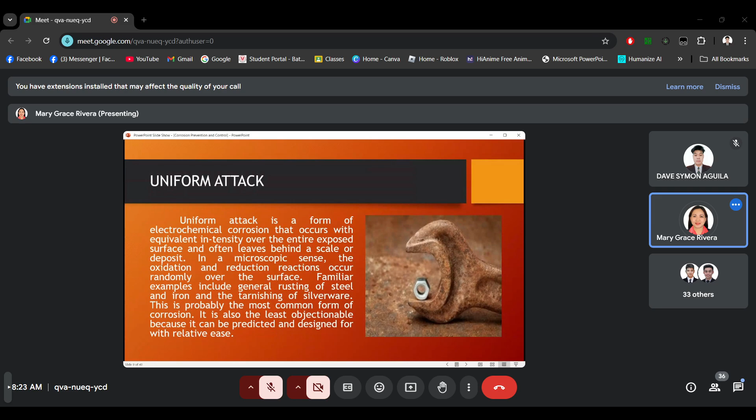Okay? It is also the least objectionable because it can be predicted and designed for with relative ease. So yung uniform attack po, mas madali lang natin siyang ma-prevent. So ito po yung mga pwede natin gawin in order to prevent uniform corrosion. The first one is we can use thicker materials for corrosion allowance. Just like po the picture na ganito, they use thicker materials.

So meaning they added the thickness of the materials in order po na kahit may kalawang na siya, may corrosion na nag-occur sa kanya, he can still use it for its main purpose. Kaya pa rin niyang gampanan yung purpose niya even though may mga kalawang na siya because we use thicker materials. So we provided a corrosion allowance. If ever po na magkaroon ng corrosion, yung strength of the materials kaya pa rin niya na gawin yung kanyang mismong gamit.

Okay, another one is to use paint. This is the common prevention and control na ginagawa natin. We use paint on the surface of the material or we coat it po. So nagkakaroon tayo ng metallic coating such as plating, galvanizing, or anodizing. For example po, galvanizing, nag-aano po tayo sa zinc. Tinutubog po natin yung ating materials dito sa other metals wherein they have a high resistance to corrosion.

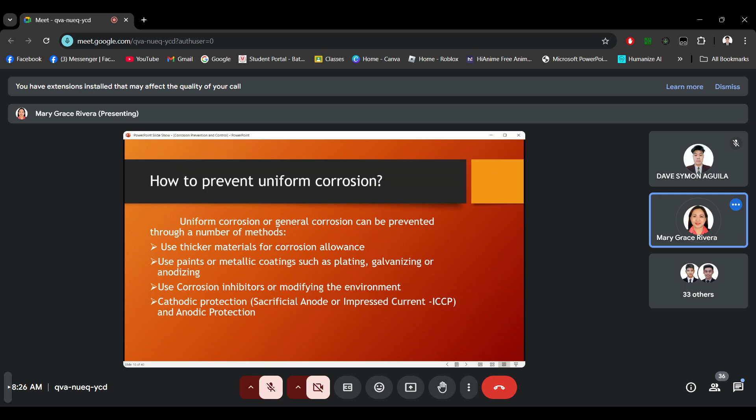Hello? Yes po, ma'am. Okay. So this is the video po for uniform corrosion, and I hope po na marinig nyo. Naririnig niyo po ba siya? Wala po, ma'am. Okay. Tanggalin ko na ulit po ang headset. Pero nakikita niyo po yung presentation? Yes po. Okay.

As you can see po, dun sa una nating video, because of corrosion or oxidation, parang nauubos na po yung ating mga metals. Parang nagiging ganyan na po yung itsura niya. So ito po yung one of the effects of corrosion dun sa ating material.

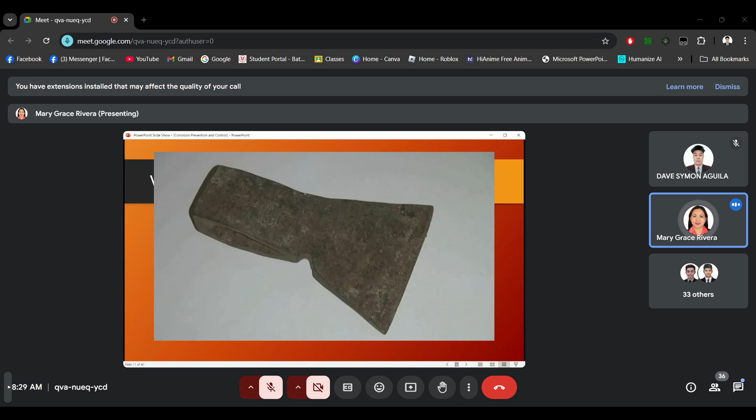As you can see, the axe's head is already quite corroded, but then again it's quite thick, so the mechanical properties have not changed much, and it could still serve its purpose to cleave off a zombie's head. So, how do you prevent uniform corrosion? Well, the most obvious thing is to use materials that are more corrosion resistant in the given environment. The other option is to use protective coatings that prevent the corrosive substances from coming into contact with the material.

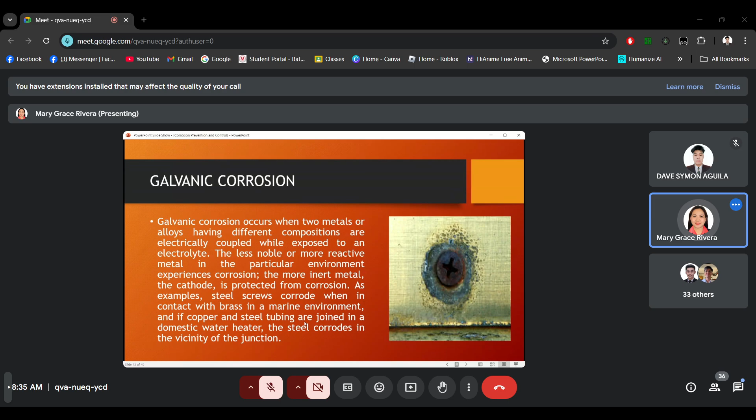Yes ma'am. Another example, we have steel and copper. Steel corroded because it is more active compared to copper. So that's what happens - the more reactive material is the one that corrodes.

We can prevent galvanic corrosion using these methods. The first one is to select metals and alloys as close together as possible in the galvanic series. When they are far apart, like copper and steel, galvanic corrosion occurs there. So what we do is choose materials that are close together in the galvanic series - meaning metals next to each other, for example cast iron and steel, are less prone to galvanic corrosion.

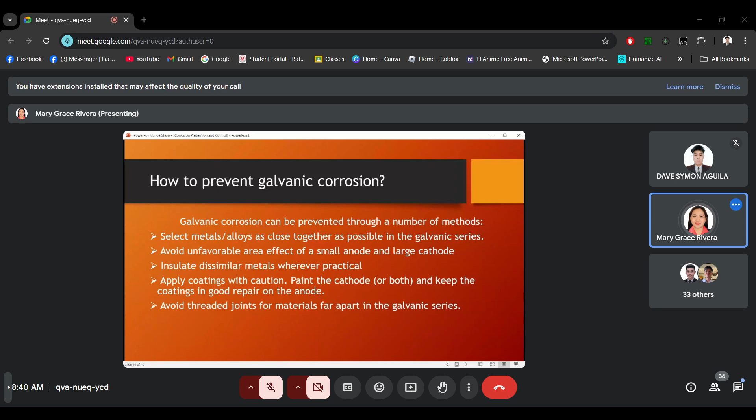We often assemble sophisticated things, but if wrong materials are used, then it causes accelerated corrosion and leads to the failure of the device.

Hello, my name is Maida and I am a material scientist specialized in nanotechnology. Today's topic is galvanic corrosion. Corrosion, as you know, is the degradation of a material, and it is generally a very slow process, but it can accelerate if wrong materials are combined.

As it was mentioned, galvanic corrosion is an accelerated form of corrosion, as it is an electrochemical process that occurs when two metals with different electrochemical activity are in electrical contact with each other. In this process, the more passive metal drives the corrosion of the active metal, while the passive metal remains unharmed. This process continues until the active metal is completely gone or the electrical connection between the two is broken.

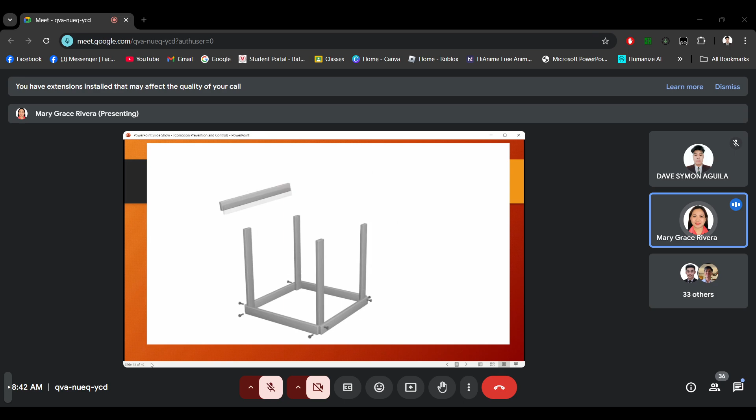Another example would be an aluminum frame connected with steel screws. Aluminum is much more active than steel, so the steel screws drive the corrosion of the aluminum frame. If this construction were closer to the sea, where there's lots of chloride in the air, the steel screws would start falling out as the surrounding aluminum corrodes away.

But let's take a closer look at why galvanic corrosion occurs. When two metals are in contact with each other and covered with an electrolyte, the more active metal becomes anodic and the passive metal cathodic. As a result, different chemical reactions start taking place at the sample surface.

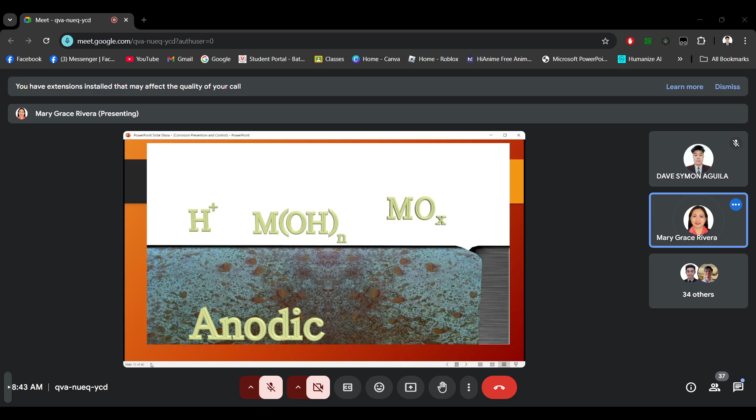At the cathode, water reacts with oxygen and hydroxide ions are generated. However, this reaction is only possible if it gets excess electrons from somewhere, and it does - these electrons come from the more active anodic metal. As the atoms are stripped of electrons, they become positively charged and highly reactive, desperately wanting to find a partner to settle down. As a result, more stable compounds like oxides and hydroxides are created, and that's what we call rust.

You might think this process only takes place if the metals are immersed in the electrolyte, but this form of corrosion also occurs very well in open air. This is because on a microscopic scale, the materials are always covered with a thin layer of water. Of course, the process is faster closer to the sea, where there's plenty of moisture and chloride in the air.

So how do you prevent galvanic corrosion? First, you should take a look at the galvanic series and combine only those materials that have an activity difference of less than 0.2 volts. You can find one of these tables easily from the internet by searching 'galvanic series in seawater.'

If you cannot avoid using materials with different electrochemical activity, you need to prevent these processes from happening. You can apply a coating on the metals to block the compounds that would take part in the reactions. Another option is to add an insulating layer between the two metals so electrons cannot pass through it, and as a result the reactions cannot take place.

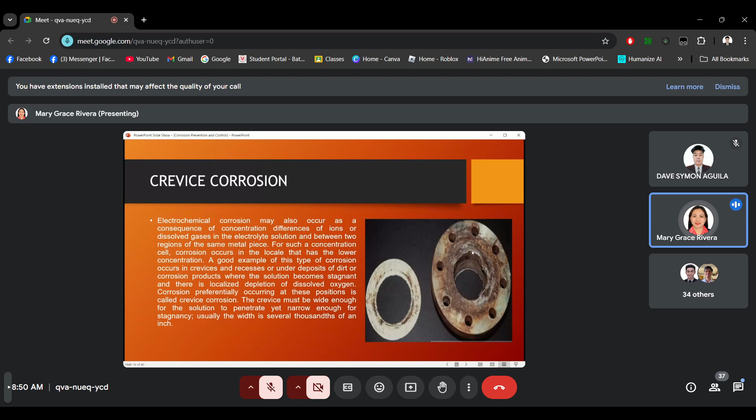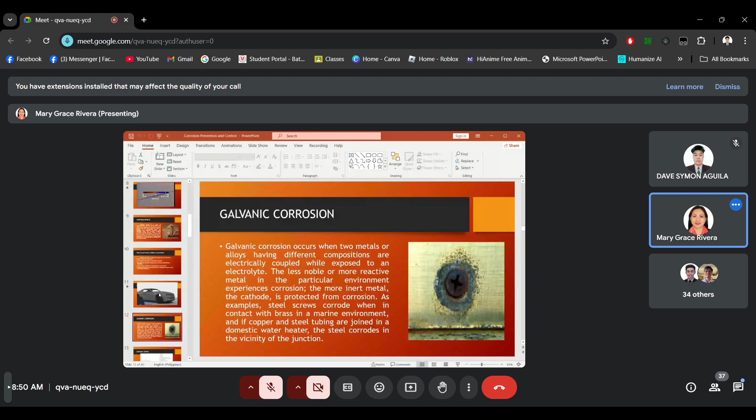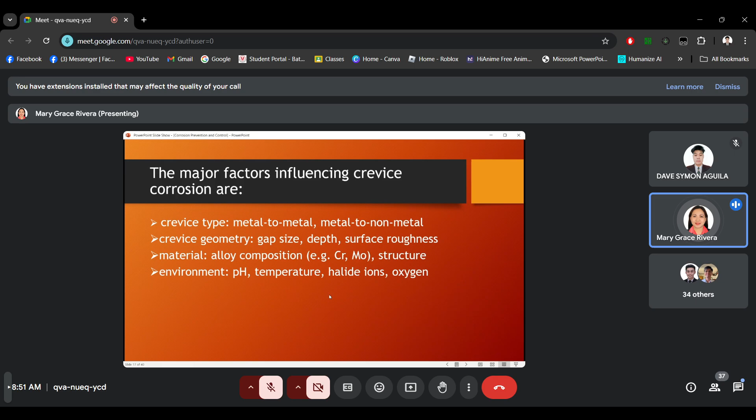What are the major factors that affect crevice corrosion? The first one is the crevice type - whether it's metal to metal contact or metal to non-metal. Then we have the crevice geometry, which depends on the gap size, depth, and surface roughness, as well as the materials used and the environment - for example, the pH, temperature, halide ions, and oxygen.

What are we going to do to prevent crevice corrosion? We have 5 different methods. The first is to use welded butt joints instead of riveted or bolted joints in new equipment, because riveted joints can be prone to crevice corrosion - the water can become stagnant there.

Next, eliminate crevices in existing lap joints by continuous welding and soldering. This is almost the same as number 1, wherein we use welded joints.

Avoid creating stagnant conditions and ensure complete drainage in the vessel. For example, in our tanks, if solutions are left behind, it's possible for crevice corrosion to occur.

We can also use non-absorbent gaskets such as Teflon, so there are no more spaces. The last one is to use higher alloys for increased resistance to crevice corrosion - use this material so that it doesn't undergo crevice corrosion, since it should have high resistance to it. So we use higher alloys, for example ASTM G48.

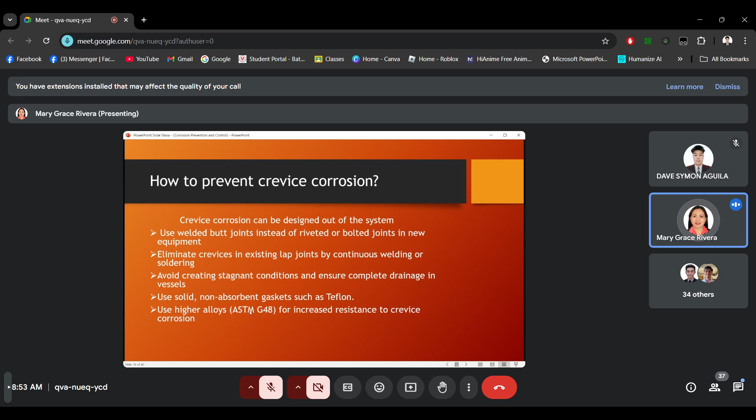This is the video demonstration of how crevice corrosion occurs. The attack occurs because part of the metal surface is shielded or in a restricted environment, compared to the rest of the metal, which is exposed to an electrolyte.

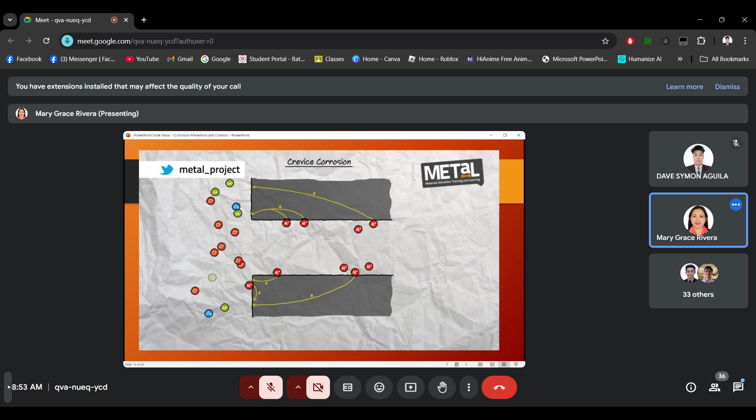The crevice now becomes a local anode and the net charge in the crevice becomes positive. This sets up a potential difference, and negative ions from the solution flow into the crevice to try to balance the charge. These ions are usually chloride.

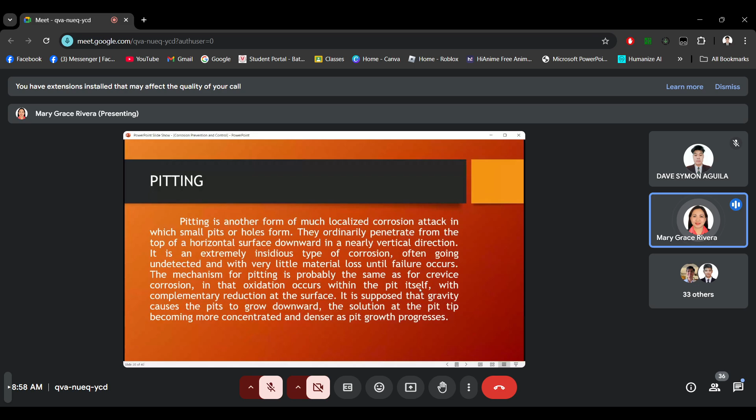And sabi dito, the mechanism for pitting is probably the same as for crevice corrosion, in that oxidation occurs within the pit itself, with complementary reduction at the surface. It is supposed that gravity causes the pits to grow downward, the solution at the pit tip becoming more concentrated and denser as the pit growth progresses. So, because of the gravity po, kaya po ang pag-grow ng corrosion natin is pababa.

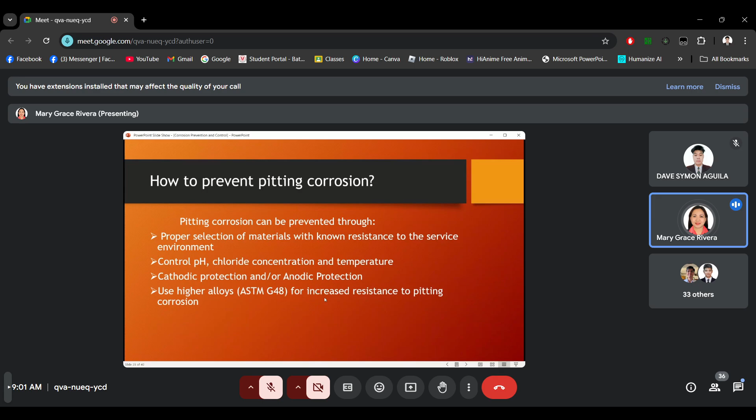And then, this one po is the video for pitting corrosion.

Another session of electrochemical corrosion, that is pitting corrosion or localized corrosion.

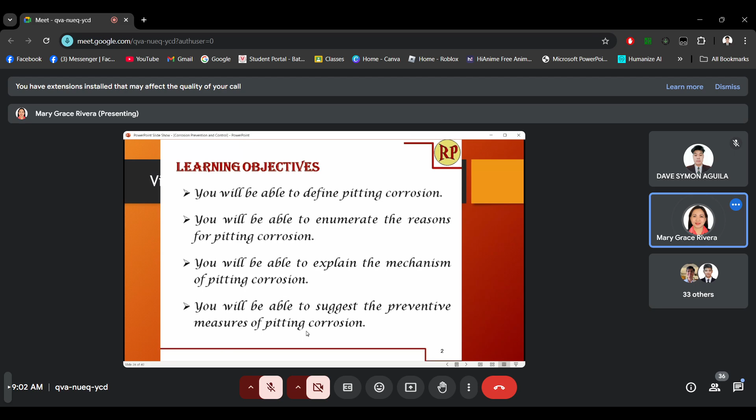Let us understand what is pitting corrosion. It is a localized attack in the metal resulting in the formation of a pit, hole, or a cavity. This type of corrosion is confined to a small point or a very small area. Let us look into the detailed reason for pitting corrosion.

When the anodic area is small and cathodic area is large, it leads to drastic corrosion in the anode to form a pit or a hole. We'll see why this happens. We all know that at cathode, reduction occurs by taking up the electrons. When the cathode area is very large, the demand for the electrons is also too high. This cannot be satisfied by the small anodic area. So the anode undergoes drastic corrosion in order to satisfy the large demand of the large cathodic area.

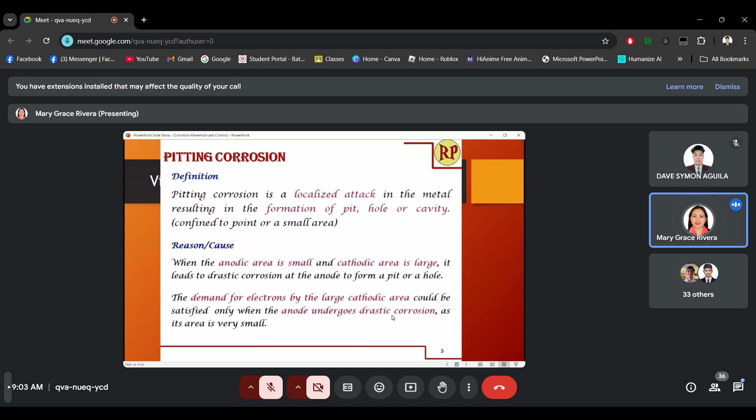This is why when the anode area is very small, drastic corrosion occurs and it forms a pit to undergo pitting corrosion. Let us see in detail all the causes of pitting corrosion. As we have already said, when the anodic area is small and cathodic area is large, pitting corrosion occurs. Why does anodic area become small?

That is when there is a damage or a crack over the protective film, or there is a scratch or a cut, if there is a local strain on the metal, if there is non-uniform stress over the metal, if there are any defects on the metal, that defective area becomes the anode. If the metal is slid under load, there can be a scratch or a damage to the protective film of the metal.

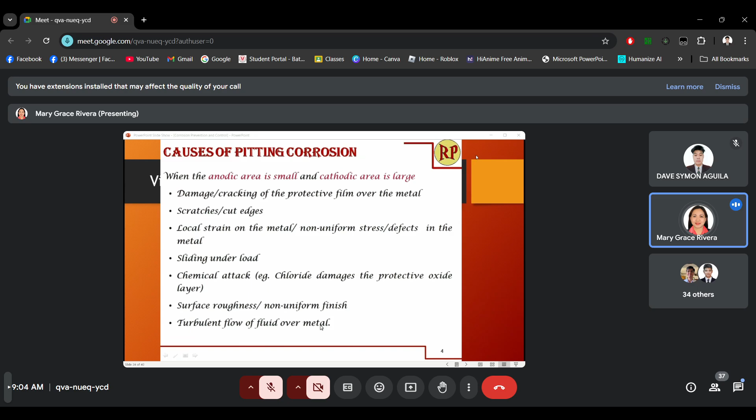Turbulent flow of fluid over the metal is also another reason for pitting corrosion. We have already discussed this example in galvanic corrosion. Anyway, we'll just look into it again. That is, when a damaged tin-coated mild steel container is left out in rain, the damaged portion acts as the anode because the fresh mild steel is exposed at that point, and all throughout the container the tin is coated. So the damage is very small, the anodic area is very small, and the cathodic area is very large. So we have the situation of pitting corrosion.

At the anode, corrosion occurs in order to satisfy the high demand of electrons by the large cathodic area, and a pit is formed at the anode. The same effect is going to happen if there is a damage in the protective metal oxide layer. We all know that all the metals form a metal oxide layer over it. Even if the layer is protective in nature, if there is a damage, the damaged portion acts as an anode, and if the damage is very small, the anodic area is small and the cathodic area is large, and it leads to pitting corrosion.

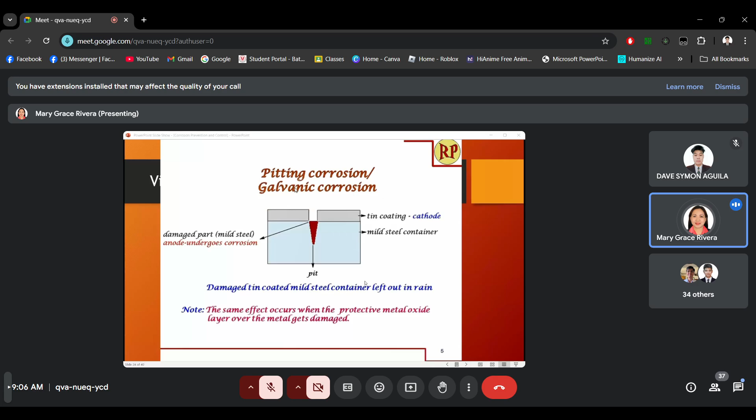This is another example of pitting corrosion, which we have already discussed in our previous session of differential aeration corrosion. This occurs due to poor maintenance. If the vehicle or the component or the machines are not maintained well, there can be dust accumulation or water droplets over the metal area. So, beneath the water droplet, the aeration condition is very poor, that is, it's poorly oxygenated, and all the other area is well oxygenated. So it leads to differential aeration corrosion.

But in this case, the anodic area is very small, because the area beneath the dust particle or water droplet is going to act as the anode. The anodic area is small and the cathodic area is too large, so it also leads to pitting corrosion. At the anode, in case the metal is iron, it gets oxidized to liberate electrons, and as the metal is a good conductor, these electrons flow through the metal, and at the water droplet, oxygen and water take up the electrons to form hydroxide ions. These hydroxide ions and Fe2+ ions diffuse towards each other to form the corrosion product, rust, in between the anodic area and the cathodic area.

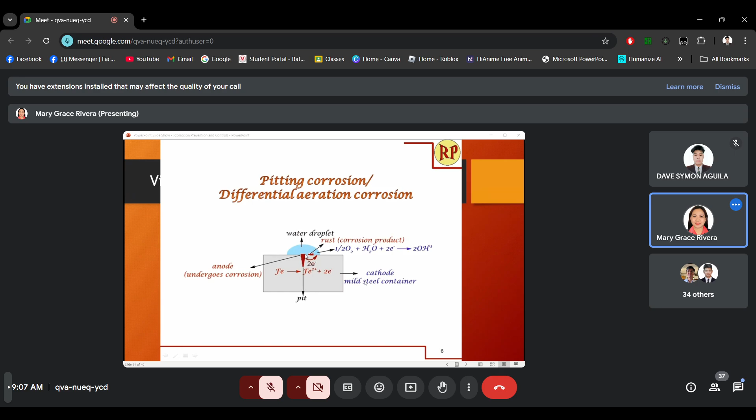And the anode undergoes drastic corrosion because the anodic area is small and the cathodic area is large. And it leads to the formation of pits. So this case becomes a pitting corrosion. Let us look into the mechanism which we have already discussed in the previous example.

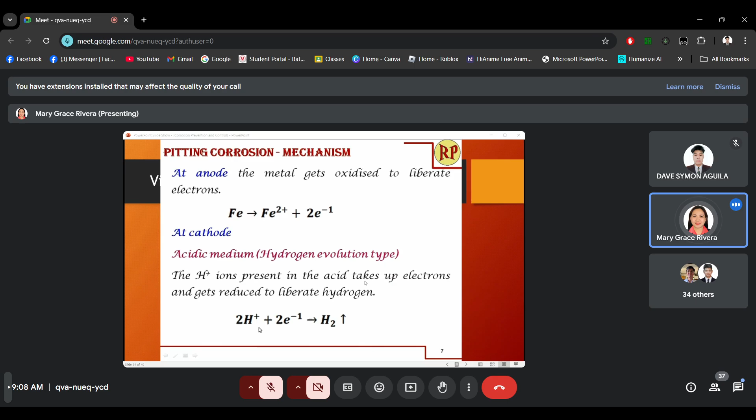At anode, iron gets oxidized to liberate electrons. And at cathode, it depends on the medium. If it is acidic medium, that is hydrogen evolution type, the electrons released in anode are taken up by the H+ ions present in the acid to form hydrogen. And if it is alkaline or neutral medium, which is oxygen absorption type, the oxygen and water take up the electrons to form hydroxide ions, which combine with the Fe2+ ions present in the anode to form ferrous hydroxide.

In the presence of excess air, this ferrous hydroxide gets further oxidized to form ferric hydroxide. In case there is no air in that environment, it forms a black rust or anhydrous magnetite. This ferric hydroxide is nothing but yellow rust, which is very common.

Let us see how to prevent this type of corrosion. We said that if anodic area is small and cathodic area is large, it leads to pitting corrosion. So, in our design, we should see that the anodic area is larger than the cathodic area. And we all know cathodic protection is a very good method of protecting the metals, but it's better to avoid because in case there's a damage in the cathodic film, as we have seen in the damage of a tin coated mild steel container, that damaged portion acts as a small anodic area and leads to pitting corrosion, which is very dangerous because it forms the hole and it totally spoils the metal.

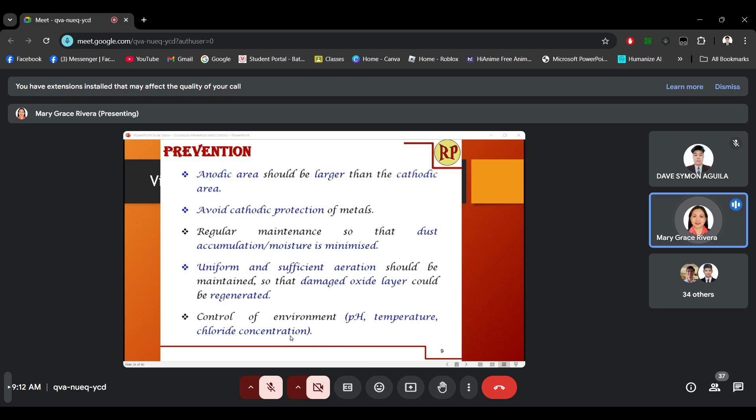Intergranular corrosion. So, as the name suggests, intergranular corrosion occurs preferentially along the grain boundaries of some alloys and in specific environments.

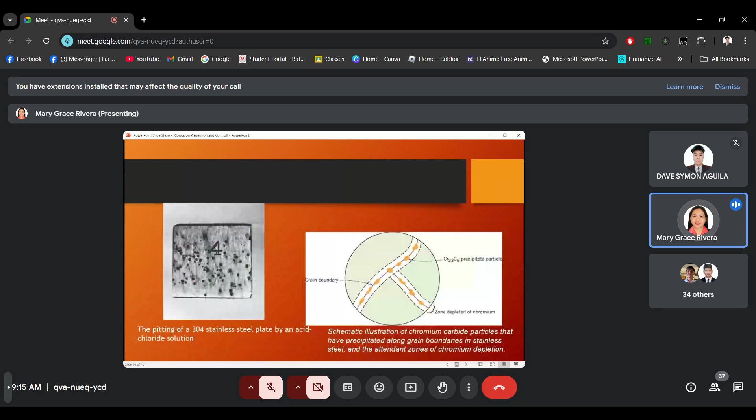These are the methods to protect our stainless steel from intergranular corrosion. The first one is subjecting the sensitized material to a high temperature heat treatment in which all the chromium carbide particles are redissolved. So, heat treatment para ma-dissolve yung na-form na chromium carbide.

During the process, for example, heating the stainless steel at 500 to 800 degrees Celsius can form chromium carbide particles. And in order to dissolve these particles, we need a heat treatment. So, we use heat treatment.

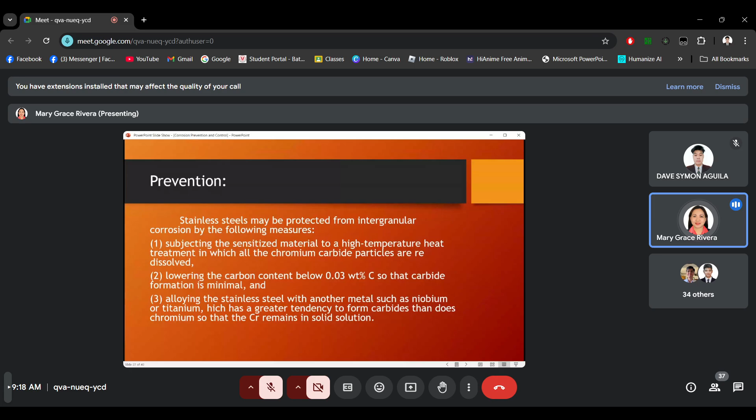Alloying the stainless steel with another metal such as niobium or titanium, which has a greater tendency to form carbides than does chromium, so that the Cr remains in solid solution. So, mas maganda daw na maglagay tayo ng niobium or titanium, kasi ang mapo-form na carbides is the niobium or titanium, hindi na si chromium.

Another type of corrosion is what we call selective leaching. Selective leaching is kapag meron tayong ni-remove na isang material. Selective leaching is found in solid solution alloys and occurs when one element or constituent is preferentially removed as a consequence of the corrosion process.

The most common example is the dezincification of brass. We have the brass and we remove the zinc; that's where selective leaching occurs. Zinc is selectively leached from a copper-zinc brass alloy, so paghihiwalayin natin yung copper and zinc.

The mechanical properties of the alloy are significantly impaired because only a porous mass of copper remains in the region that has been dezincified. In addition, the material changes from yellow to a red or copper color. Selective leaching may also occur with other alloy systems in which aluminum, iron, cobalt, chromium, and other elements are vulnerable to preferential removal.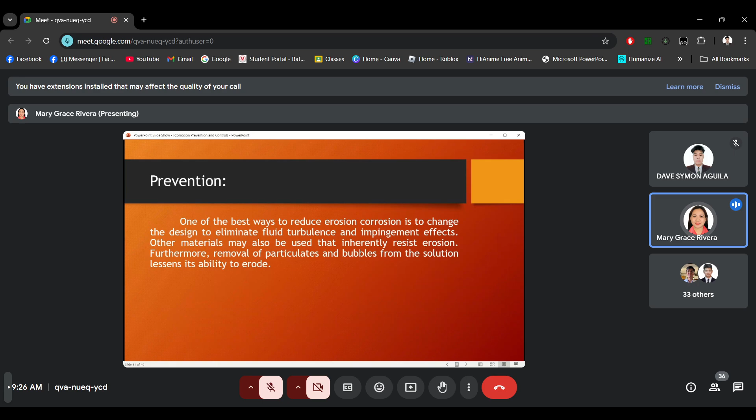Sabi dito, other materials may also be used that inherently resist erosion. Yung mas matitibay po na material. So, furthermore, removal of particulates and bubbles from the solution lessens its ability to erode. So, isa pa po, tatanggalin daw po natin yung mga bubbles and particulates sa ating solutions para hindi magkaroon siya ng erosion din po.

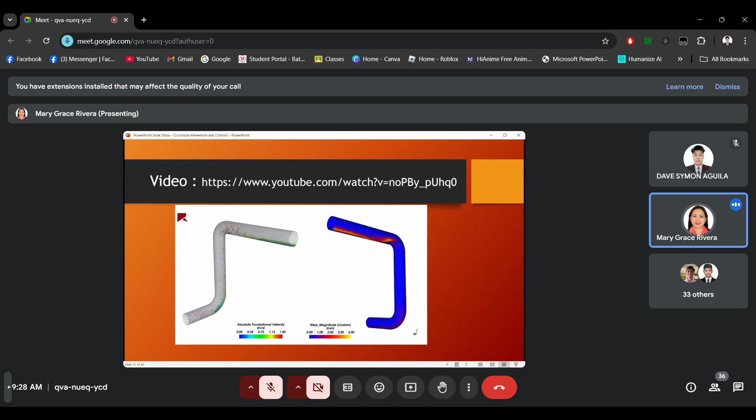Okay, ang next po natin, malapit na tayo matapos. So, ang next po is what we call po the stress corrosions naman po. Stress corrosion sa course po, yan. Ang stress corrosions po is sometimes called din po as stress corrosion cracking.

Ito po ay combination ng combined action ng applied tensile stress and the corrosive environment. Dahil sa stress po, pwede din pong mag-corrode yung ating material dahil sa tensile stress at sa ating environment. Ang tawag po dito ay stress corrosions. Sabi dito, in fact, some materials that are virtually inert in a particular corrosive medium become susceptible to this form of corrosions when the stress is applied.

Kahit ang materials natin ay inert, pwede po siyang ma-form yung ating corrosions kapag nag-apply po tayo ng stress dun sa ating material. Sabi dito, stress corrosions ay nangyayari kapag small cracks form and then propagate in the directions perpendicular to the stress, with the result that failure may eventually occur.

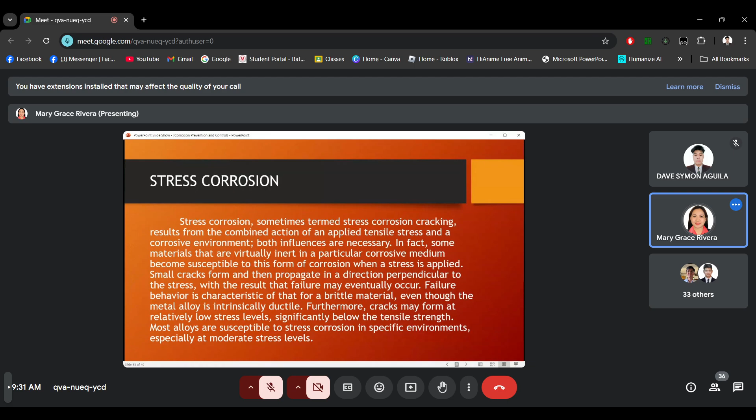Dahil sa stress po, pwede din mag-occur ang corrosions: corrosions, stress, and then the environment. Halimbawa, yung ating environment po ay may high temperature, tapos ma-moist, so pwede po siyang mag-occur into a corrosions. Ito po ang example ng ating mga nangyayari kapag siya ay in a form of stress corrosion - nagkakaroon po tayo ng crack, nagka-crack po yung ating material.

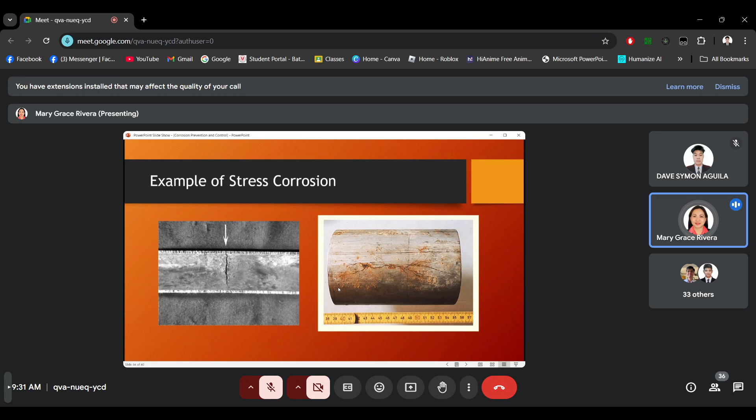Paano daw po natin mape-prevent yung stress corrosions? Sabi dito, the best measure to take to reduce or completely eliminate stress corrosion is to lower the magnitude of the stress. Ganun lang siya kadali, kailangan lang natin ibaba yung stress natin. Kasi kapag siya ay medyo mataas na po yung stresses natin and corrosive po yung environment, magpo-form talaga siya into a stress corrosions.

Pero kung ilo-lower daw po natin yung magnitude ng stress, ma-eliminate po natin yung stress corrosions. Sabi dito, this may be accomplished by reducing the external load or increasing the cross-sectional area perpendicular to the applied stresses. May two-way tayo: pwedeng i-reduce natin yung external load o palalakihin po natin yung ating material.

Furthermore, an appropriate heat treatment may be used to anneal out any residual thermal stresses. Kung meron naman pong thermal stresses yung ating material, pwede din po ito i-apply ng load o thermal load. Pwede daw po natin matanggal yung thermal stress using the heat treatment - pwede natin i-heat treatment yung ating materials in order to remove po yung stresses na nandun sa kanya, thermal stresses.

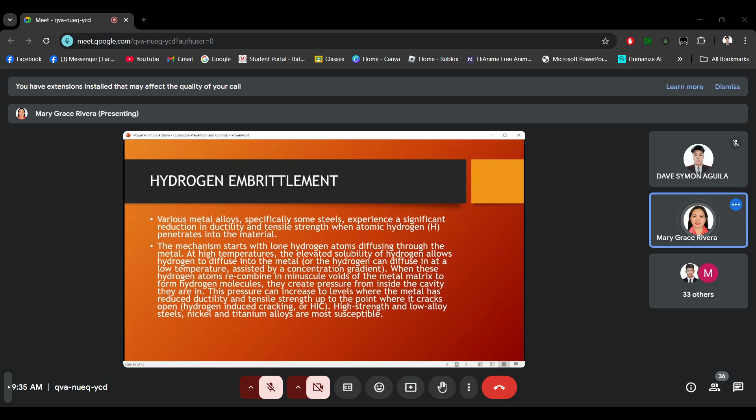Sabi dito, tensile stresses, susceptible material, and the presence of hydrogen are necessary to cause hydrogen embrittlement. Ito po yung magkakasama: stress, susceptible materials, and hydrogen. Yan po yung nagkakasama na tinatawag natin na hydrogen embrittlement.

Residual stresses or externally applied loads resulting in stresses significantly below yield stresses can cause cracking. Thus, catastrophic failure can occur without significant deformation and obvious deterioration of the component. Kapag nagsama-sama ang stress at may nag-penetrate na hydrogen, it can cause failure sa ating materials. At yun po yung ating iniiwasan na mangyari sa ating material.

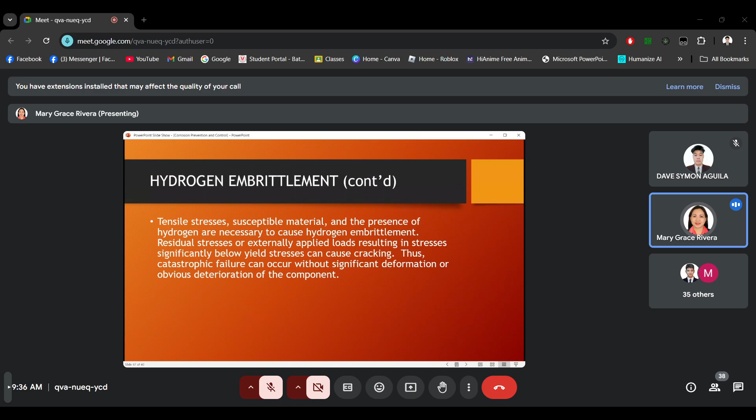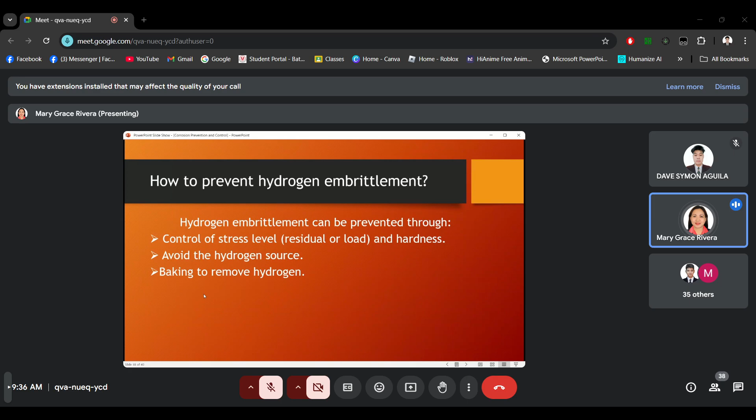Ito daw po yung mga way natin in order to prevent the hydrogen embrittlement. We need to control ang stress level and the hardness of the material. At syempre, para hindi siya mag-occur into hydrogen embrittlement, we have to avoid the hydrogen source. And we can remove the hydrogen into materials by using heat treatments na tinatawag po natin siyang baking.

So ito po yung video natin for the hydrogen embrittlement. Have you ever experienced a broken screw in one of your products?

Unexpected failures of fasteners cause damages and high costs. One of the reasons could be hydrogen embrittlement. Hydrogen embrittlement, also known as hydrogen-induced cracking, is a process whereby metal becomes brittle or fractures due to the exposure and diffusion of hydrogen through the metal. Hydrogen embrittlement is a serious matter that mechanically degrades a range of different structural materials. It can be divided into two types: environmental hydrogen embrittlement, where failure is due to the supply of hydrogen from the environment, normally through corrosion; and internal hydrogen embrittlement, where failure is due to the supply of hydrogen during manufacturing, for example the cleaning and plating processes. Hydrogen embrittlement of fasteners is typically associated with carbon and alloy steels, but other metals and alloys can also be affected. For the fastener, the hardness is an essential parameter. The failure of a fastener caused by hydrogen embrittlement is a delayed and brittle fracture and occurs only after installation, for fasteners exposed to tensile stresses. Selecting an appropriate surface treatment that does not generate hydrogen during the plating process avoids the internal type.

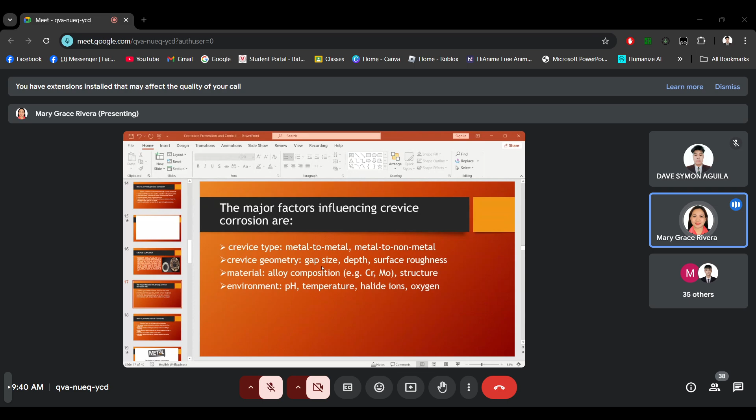So that's all po yung ating corrosion prevention and control. Meron po ba kayong tanong?